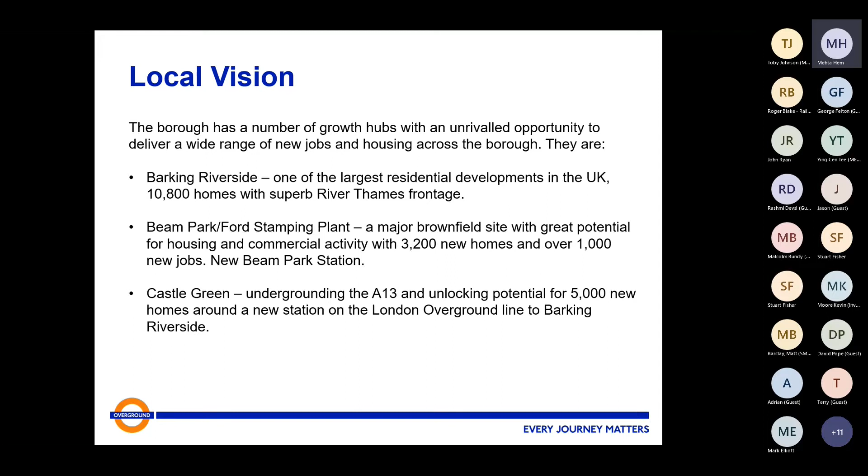Just capping on what we said already. So Barking Riverside, it's a key development area. The Riverside development is the largest housing development in the London area. The project outturn cost is £327 million. Transport for London are not paying for all of £327 million. Barking Riverside Limited, as a condition of their planning, basically fund the rail link. We began construction in autumn 2018 and train services are going to commence in 2022.

The delivery of the extension will unlock a wide range of benefits for people in the local area and beyond. The 10,800 new homes, many of which are actually affordable, along with a new school, which is actually now open and in operation, and healthcare facilities as well. The construction of a new district centre with commercial and leisure facilities, and it's now rumoured that there's going to be a mini O2 type events amphitheatre thing there.

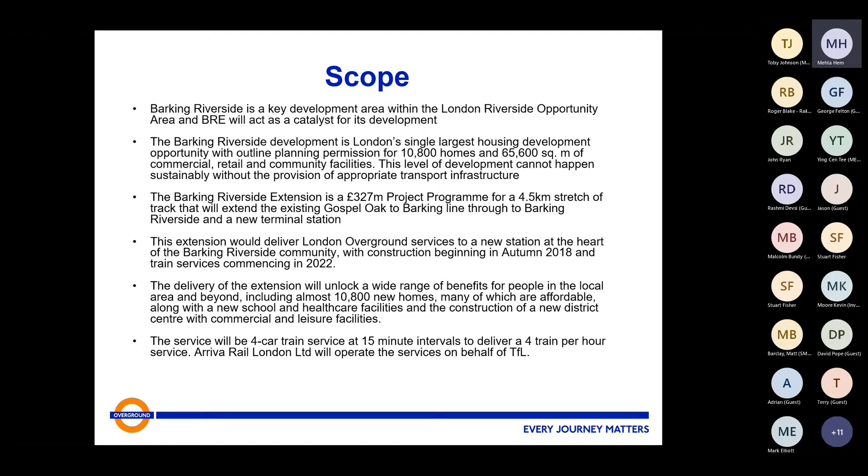The train service we're going to be running will be a 4-car train service at 15-minute intervals, so that's 4 trains an hour, and Arriva Rail London Limited will operate the services on behalf of TfL.

The stakeholders that we had to work with in the development of the scheme initially were Network Rail, the Strategic Freight Network, Barking Riverside Limited, London Borough of Barking and Dagenham, DB Cargo, Legal and General, who own a huge amount of land that we had to build our railway over. High Speed One, which was interesting. Lots of line-side neighbours, really from a land and boundary fencing point of view.

It is not just the extension to the network that we're building that's the problem, it's the fact that we had to reinstate the old abandoned down goods line from Barking all the way down to where our railway diverges. That runs through a heavily populated corridor. It was a 3-track railway, it's now a 4-track railway, and we had, I'm trying to remember how many now.

About 90 4-track overhead line portal structures to construct at the bottom of people's back gardens, and all of those were driven piles. So neighbours was a key concern during the development of the proposals. New schools: when there's a new school in the area and you're bringing a railway to the area, you have to consult with those and also make sure that the pupils are aware that what you're introducing is inherently somewhere you don't want kids to be playing.

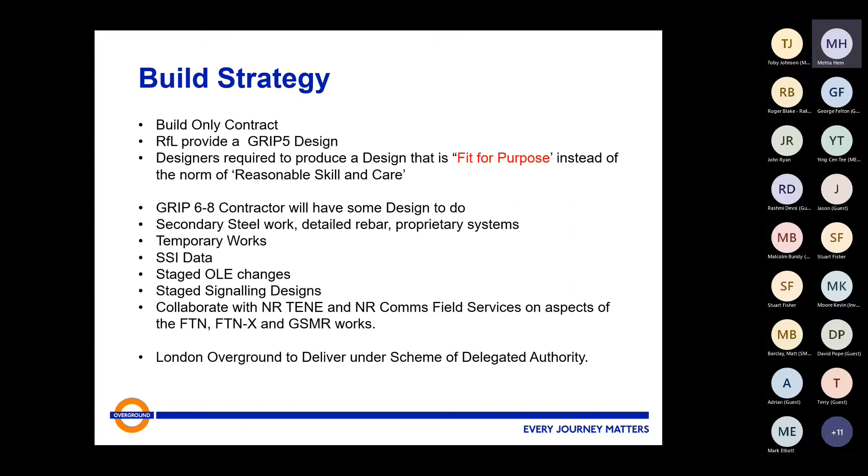So first off, there's existing infrastructure east of Barking Station. We reinstated the abandoned down goods line as a new up Riverside, and we'll get into that in a bit. On that section, there's 3 kilometres of new ballasted track. There were 13 renewed 4-track OLE portals. There were 8 new 5-track or more OLE portals. The longest OLE portal we actually ended up building, at Ripple Lane West, was 45 metres side to side as a self-supporting structure.

There were 62 new simple overhead line structures. We had to renew 3 overhead line neutral sections. In total, and this goes back to the bottom of people's gardens, there were 102 OLE piled foundations. A new 40-mile-an-hour crossover from the up goods to the up Riverside. This will make sense in a bit. And a new 50-mile-an-hour connection from the down Tilbury to the new down Riverside.

And also we remodelled Ripple Lane West sidings to give us the footprint to squeeze the new Riverside lines through in that area. That was 10 renewed point ends. Within Ripple Lane West sidings, there was a kilometre of formation remediation, and everything was basically re-signalled with associated TPWS and AWS infrastructure where it was needed.

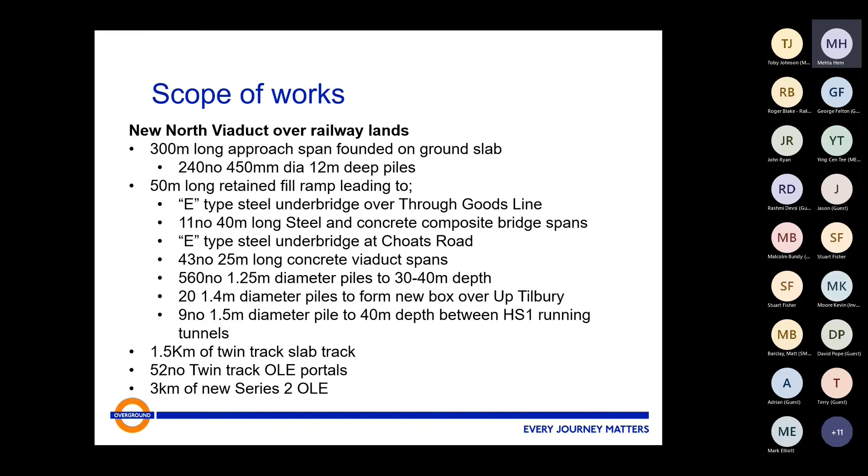So what that will give us is new infrastructure that supports the 4 trains an hour service. It also supports future service requirements for C2C. So when I referred to the TOCs and FOCs earlier, we had to do a huge amount of timetable modelling to prove that the future service requirements and aspirations of C2C matched with what you have to put in for the London Overground service.

Also, we had to factor in the effects of Beam Park Station, which is being built just down the road. In fact, it's about 800 yards away from where we split off from the railway.

We also had to clear all of the sidings that currently exist in Ripple Lane for GB2 gauge for High Speed 1 freight. Only one road was cleared for High Speed 1 GB2 freight, and unfortunately, as part of our scheme, that became a head shunt and got somewhat shortened, let's put it that way. So we had to gauge clear everything else in the area for continental gauge freight, and also cater for 2 trains an hour electrically hauled freight in the peaks as well.

The last point on this slide isn't actually accurate any longer. There were issues with the 25 kV feeder station at Barking because there was perceived to be problems with the incoming cables needing renewal by UKPN, which meant that, in effect, Barking feeder station was derated. But during the life of the project, the feeders were reassessed and pressure tested, and the feeder station is now working at its full capacity again.

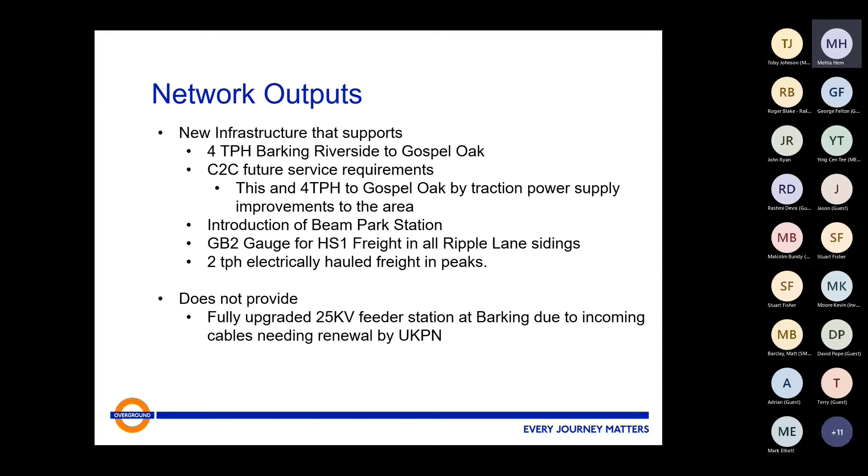Provision of 775 metre freights on the network is something everybody wants. We were requested by Network Rail to develop a full approval in principle design for those sidings to be built as a 775 metre scheme. We did that, delivered it to Network Rail, and when we finished Barking Riverside, that scheme then kicks off.

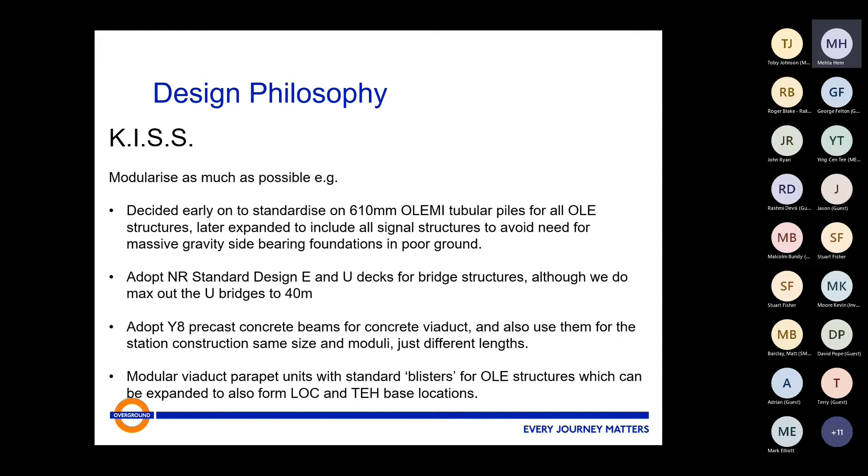Some of the problems we had were geotechnical - this was a real head scratch. The ground conditions in the Barking area, bearing in mind it's on the banks of the Thames, are extremely variable. It's alluvial deposits - there's peat to 5 metres depth in places, very high water table up to 1 metre below ground level. Lots of people actually thought the water table down there was going to be tidal. It isn't.

So rather than just relying on simple boreholes, we also undertook some pretty detailed geophysical investigation of the ground, to map out and see exactly what we were getting down there in terms of densities of soil and soil characteristics and behaviours. Boreholes are all well and good, but they're expensive and you can't do them everywhere. Geophysics is good and you can cover a large area. What you can see on the left is some of the geophysical results we got from doing the ground penetration radar and resistivity surveys over the brownfield site.

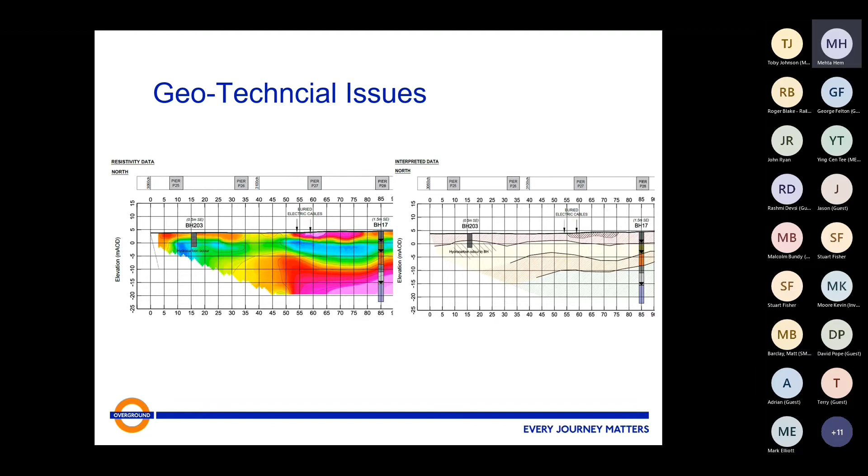When we got onto the actual national network itself, the formation and trackbed that we decided to adopt was completely compliant with Network Rail standard 4239 for formation and trackbed.

It is incredibly soft and incredibly variable though, so in critical areas like under the new 50-mile-an-hour diverging turnout, we used micropiling to stabilise the ground underneath. We also used other methods wherever we had to.

One thing we introduced since then as a value engineering exercise was, on the sidings and the new Riverside, to remove the dead load from the existing formation that you'd introduce from using heavy concrete sleepers like G44s. We went with steel sleepers instead.

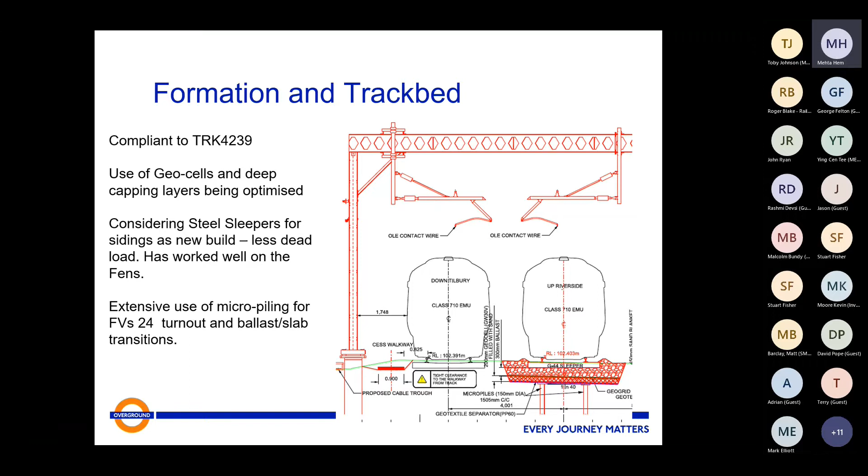Steel sleepers are lighter than concrete, but they work really well on soft ground conditions. I proved that when we were doing lots of steel sleeper renewals on the Fens back in the mid-2000s. It's all to do with precess waves and Rayleigh wave velocities, in effect trackbed critical velocity issues. It's worked well, and the steel sleepers enabled us to increase our delivery rates on some of the plain line sections.

Gauging, as we referred to earlier, was done as per normal, using Clear Route 2 for passenger running lines through an agreed vehicle line. Ripple Lane siding 1 was the only siding up there that was currently clear to GB2 gauge.

But as siding 1 disappeared as part of our scheme, to all intents and purposes any alterations to the sidings, including the up and departure line towards Barking, also had to be cleared to GB2 gauge because they were currently foul. In actual fact, it was only 3 signals that were foul to GB2 gauge, as we found out. At the time, ClearRoute, one of the standard gauging software packages, couldn't handle GB2 gauge, so we had to go down the road of using defined gauging as required by BS EN 15273. That was a bit of a challenge, but we managed to get it undertaken.

One interesting part of the project was that we required a blockade to undertake some works on the Up Tilbury line, and we needed to block it in that area for 6 weeks. There is a diversionary route for freight, meaning freight wouldn't have to travel over that section of track, and the train operating company C2C was quite happy for that blockade to take place.

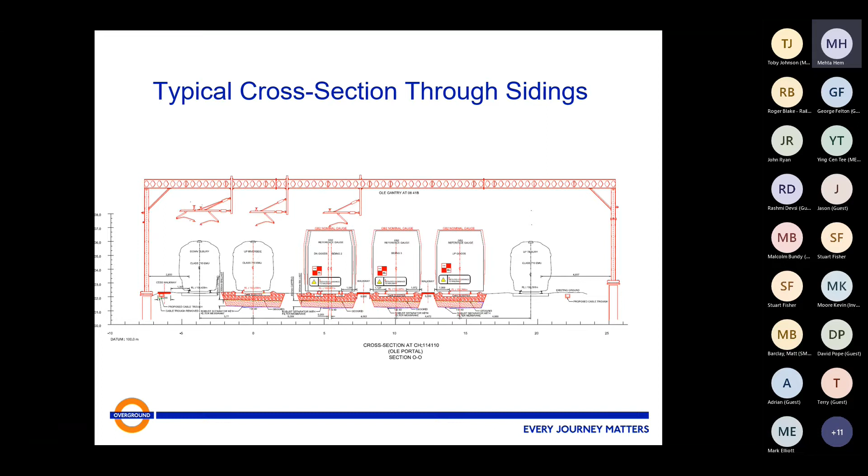Interestingly, all of the overhead line portals we built also had to cater for the future extension of those sidings to 775 metres. So some of them are a lot longer than they appear to need to be, but they won't be once those sidings get straightened out in the future and become even longer.

Don't really think we want to look at this. Right, okay. I'll skip through that slide. It runs for a long time. Some of the challenges that we had. Probably the biggest challenge that we had on the project was the high-speed running tunnels.

You see there in red is the model of the viaduct, the steel composite structures that are travelling over the railway lands. I hope you can make out the high-speed running tunnels that are there roughly about 15 metres below ground level and diving down to go towards Stratford. The only way that we could make the design work in terms of articulation of deck ends and getting everything to work properly was to provide a particularly long span there.

That's a 40 metre long span, which would need supporting in its middle, but we couldn't support it at right angles to the track because to do so would have meant piling through both of the High Speed 1 running tunnels, which probably wouldn't have gone down that well with High Speed 1. So what we ended up doing was piling between the 2 tunnels. That took a lot of agreement with High Speed 1.

To give you an idea of how close we actually got to the tunnels, each one of the High Speed 1 running tunnels has got a 3 metre annulus around it, which is a no-go area. And thou shalt not go within that 3 metres. And there's another 3.5 metre gap between the 2 annuli. And we had our piles at 1.5 metres diameter that had to go straight down in the middle of that gap between the two annuli.

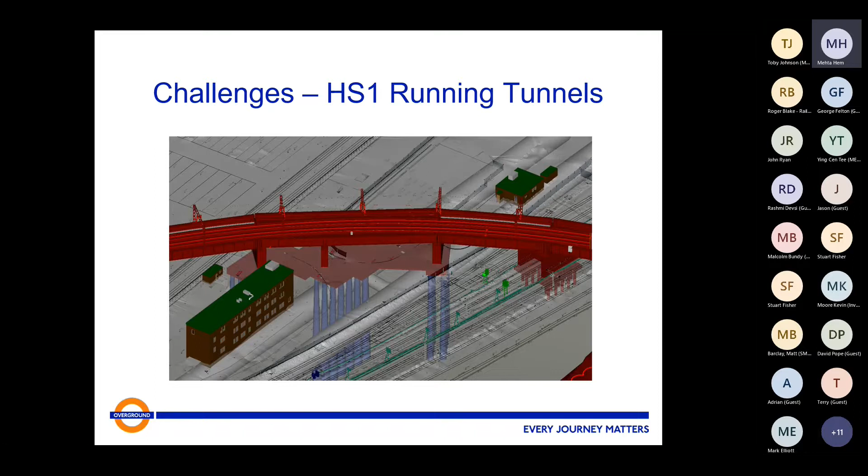A few more bits on the High Speed 1 bit there. I've already covered all of this. The piling was carried out under liquid support with bentonite. I think I've covered all of that off. Oh, the only other thing that we did have to do was work out how to transform the CTRL grid to OSGB36 grid and then into LSG 2007, which was the engineering grid for the project. That taxed the minds of an awful lot of people. In the end, University College London spent 4 months working out how to transform between the 3 grids to actually get something right.

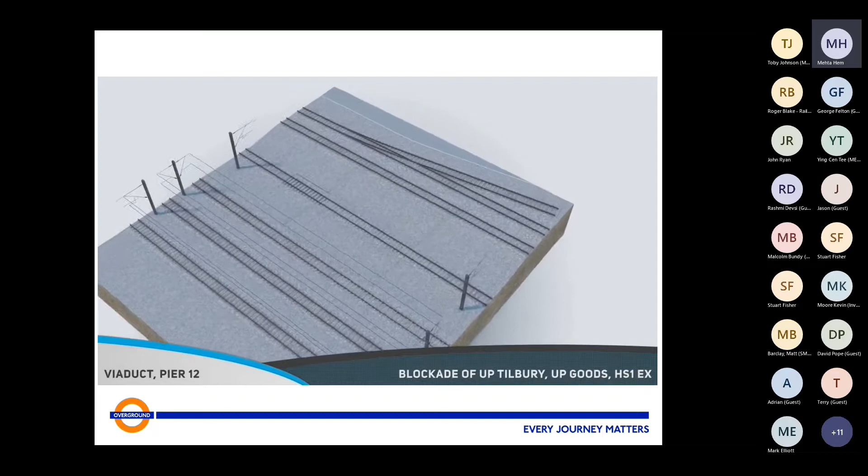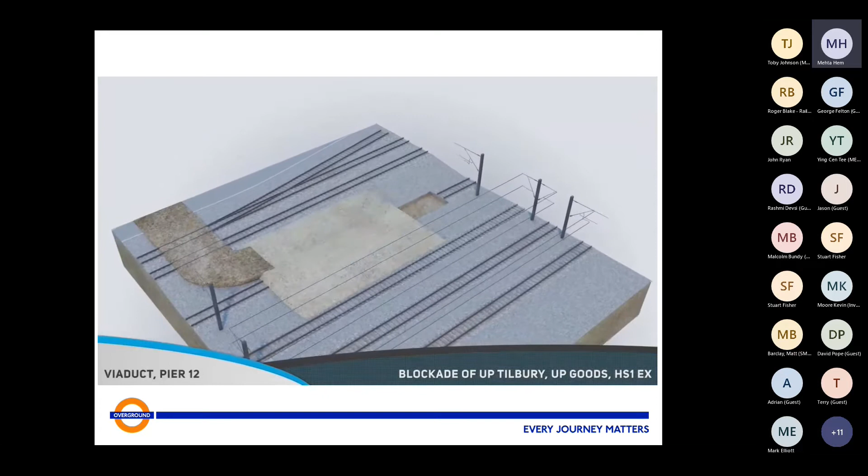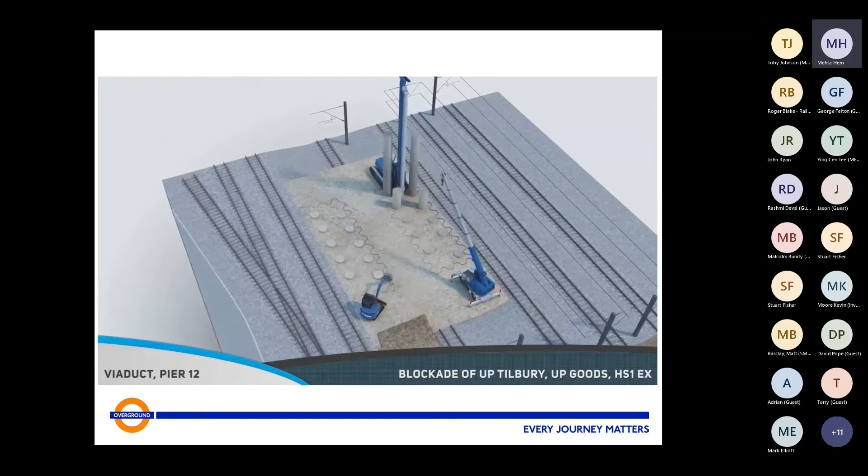I was talking about the box over the Up Tilbury, and I've also spoken about the works that we did at Upminster to gauge clear. We had here, in a 6-week blockade, we had to build foundations. The reason we took a 6-week blockade was to do it. Doing it in a normal weekend session, you'd only get one pile session every weekend. That was just 6 weeks.

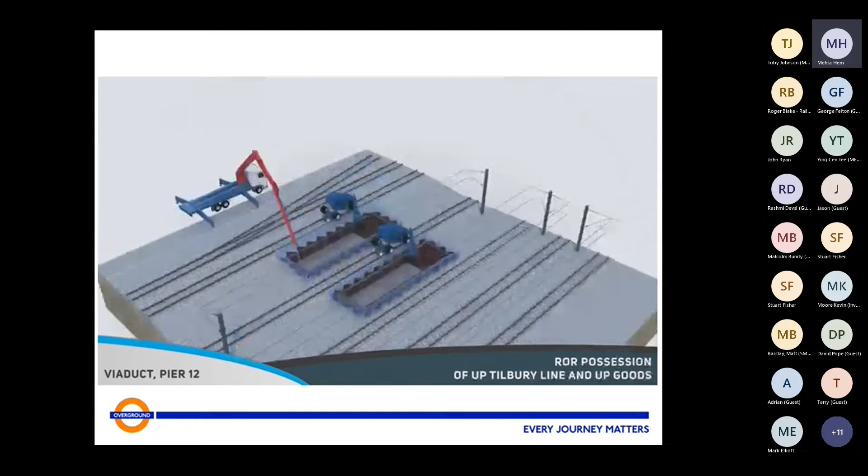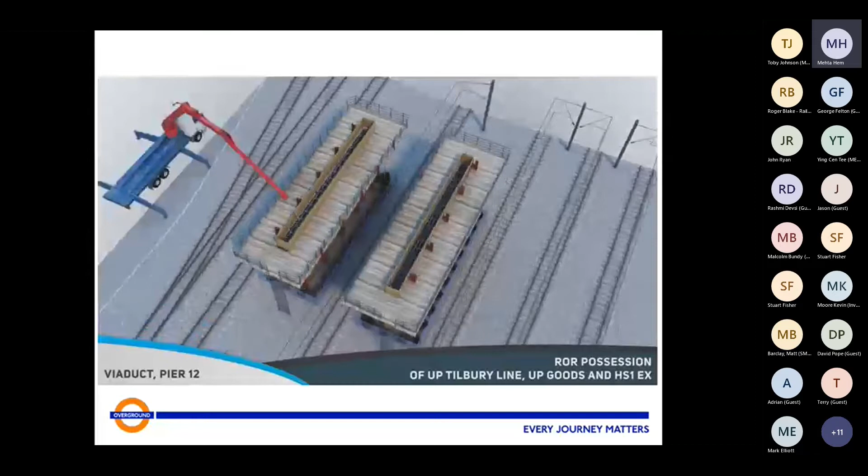And what you're seeing now is the follow-on works as predicted by the computer modelling. 4D modelling. And now you can see the bearings going up on the plinths for the support for the new viaduct structure that goes over the top.

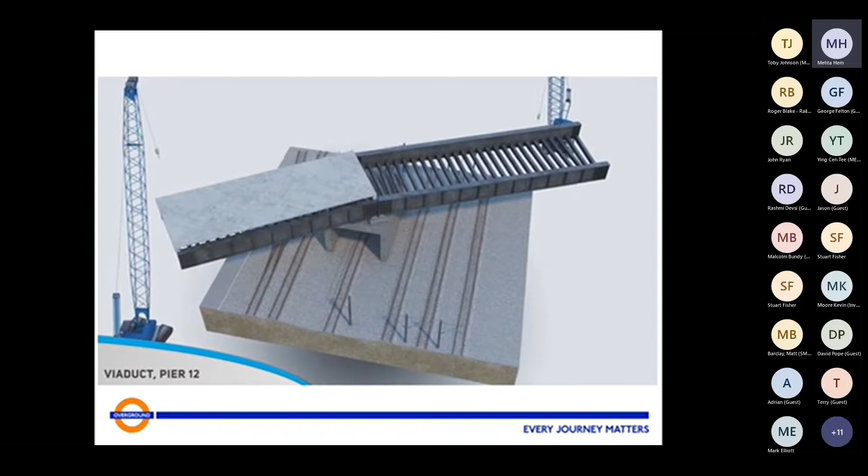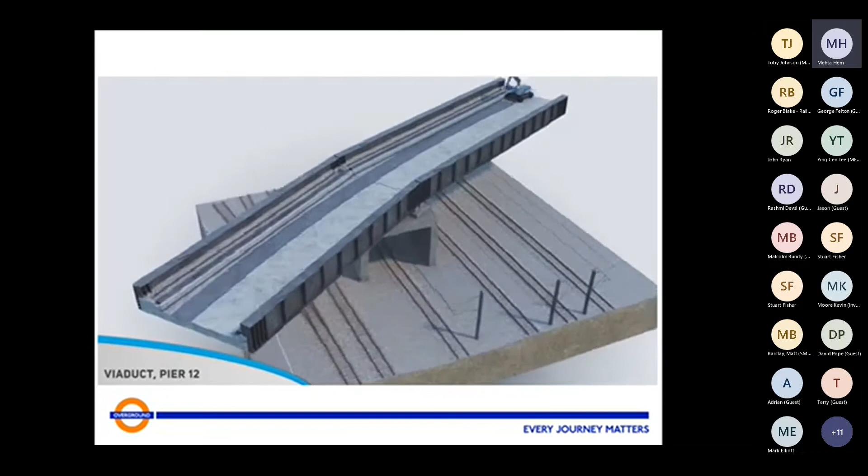Which is all very nice in terms of 4D modelling, but this is what it actually looked like in reality. It's full work. This is after the blockade. We've returned the railway to operational service now. It's the process of returning it to operational service.

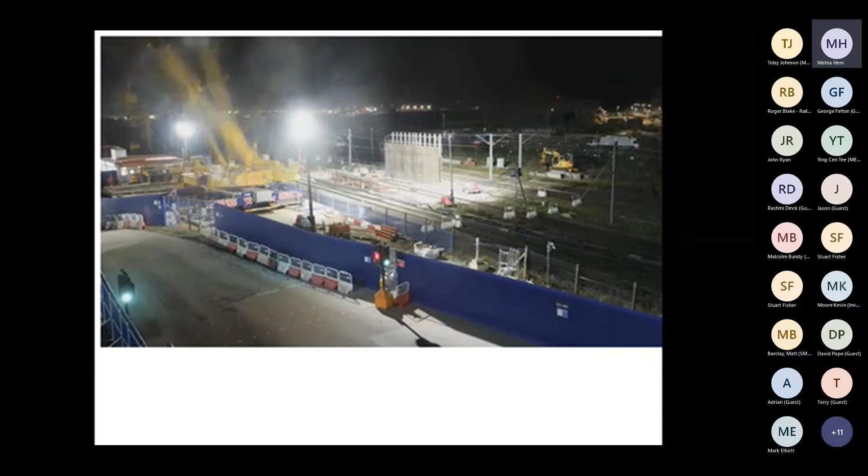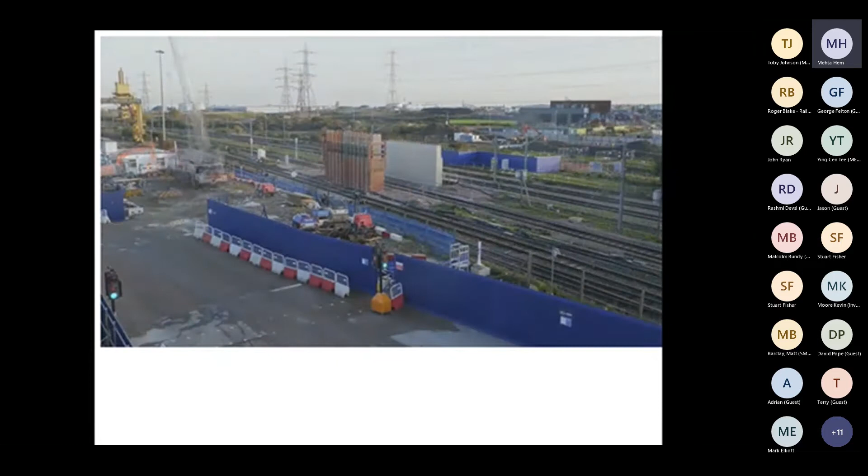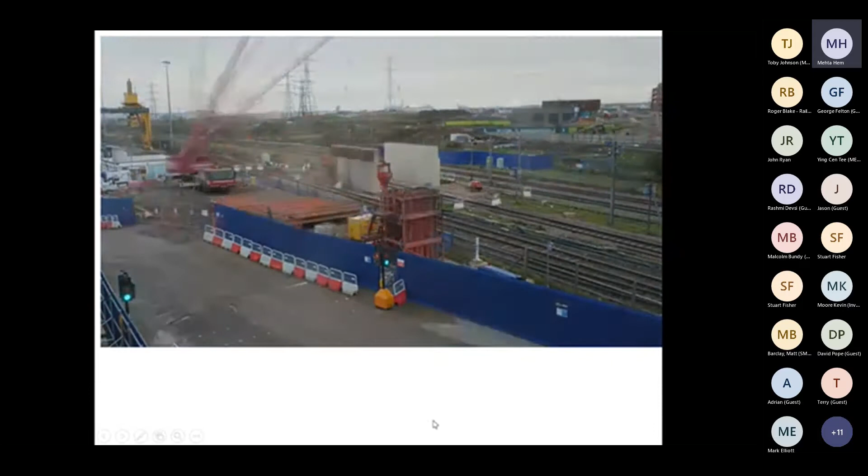All of this work is being done in weekend possessions. We're doing other work. So what you're seeing here really is pressed into a couple of minutes. It's probably fair to say that this box is one of the most difficult things to build that we've had to do on the project.

Oops, don't know what happened there. Sorry about that. I seem to cut that short. I won't go back. We don't want to go through that again.

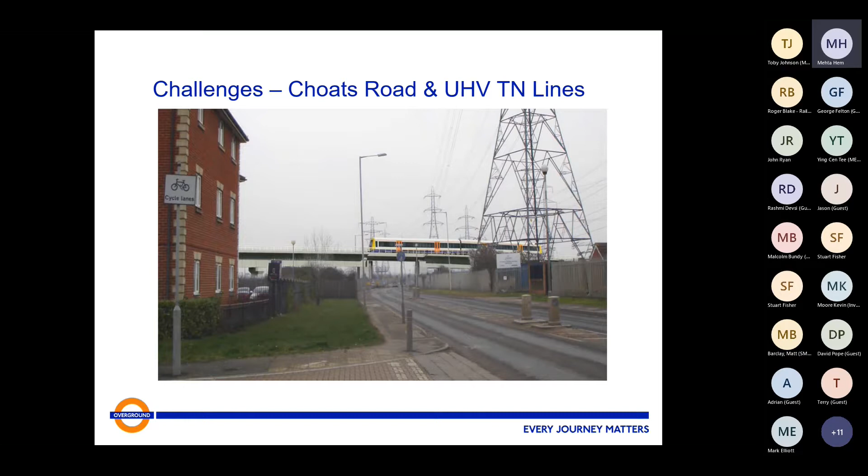When you actually put all the figures together for what you require for electrical clearances and safe clearances as per BS EN 50122 part 1, we ended up with a 100mm tolerance window within which we could actually put our rail level. Very challenging. At the same time, we had to make sure that all of the track gradients were compliant, all the equivalent gradients were compliant because of the curvature of the railway at that point.

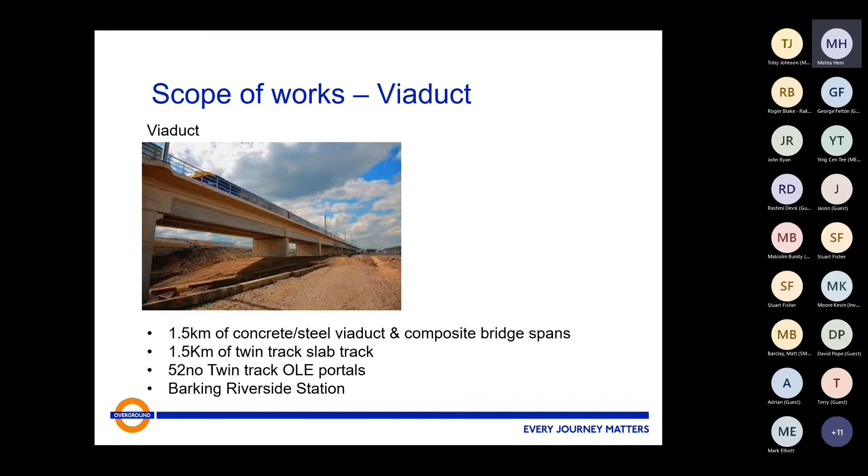So the viaduct itself is 1.5 kilometres. We said already, concrete, steel viaduct and composite bridge spans. There's 1.5 kilometres of twin track slab track. On the viaduct itself, there's 52 twin track OLE portals. We've now got quite a few single track cantilevers in there to improve signal sighting. And there's Barking Riverside Station at the end.

Oops, don't know what's happened there.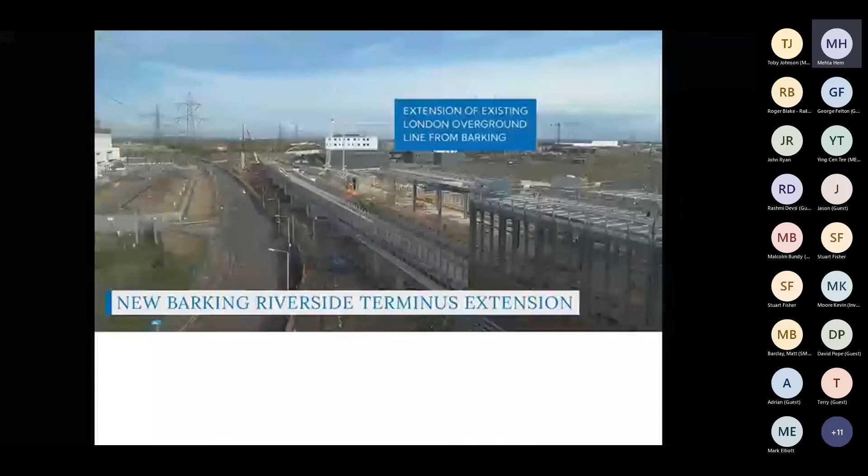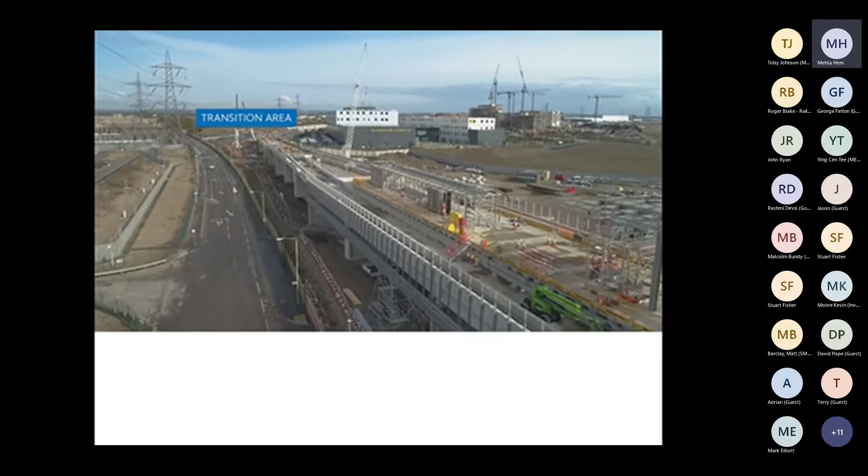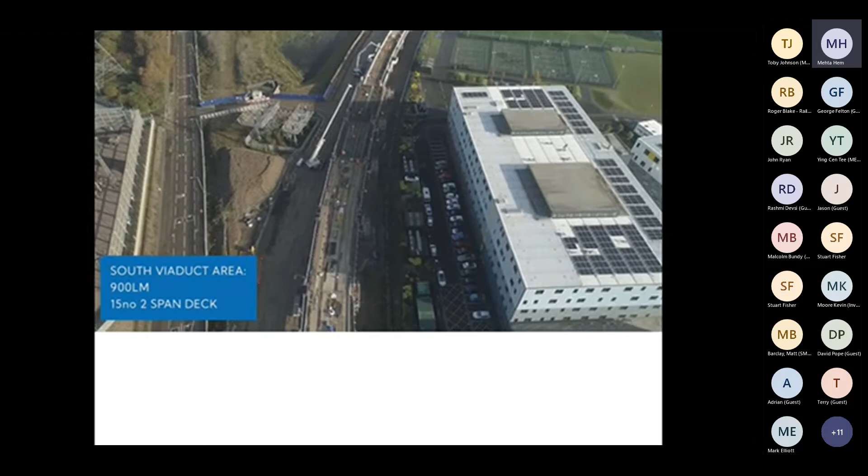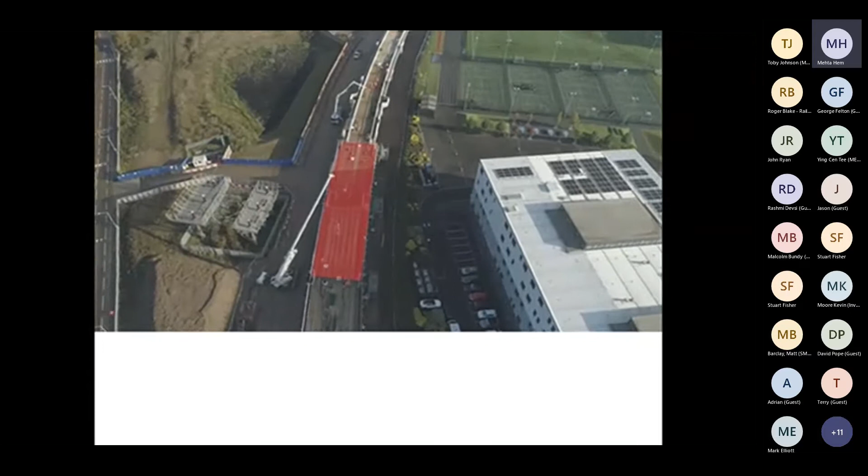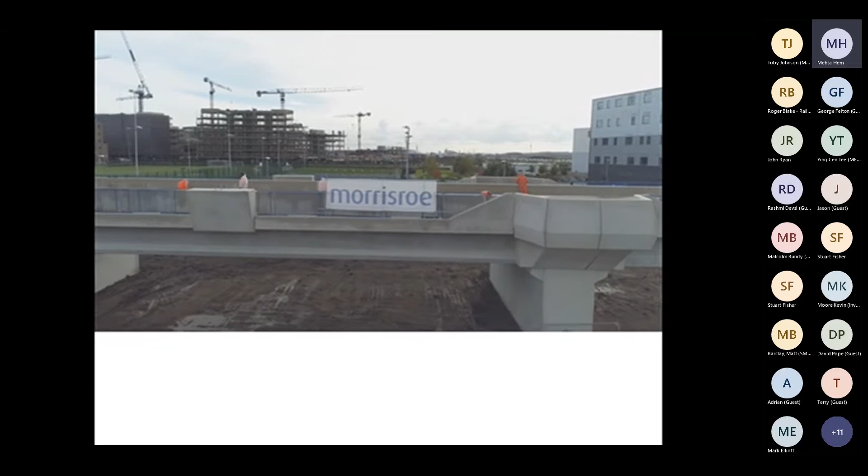That's Morrisroe there. And this is what we start. You can see the development going on actively in the background there. That's for the homes that will be leased for sale once the extension is in operation.

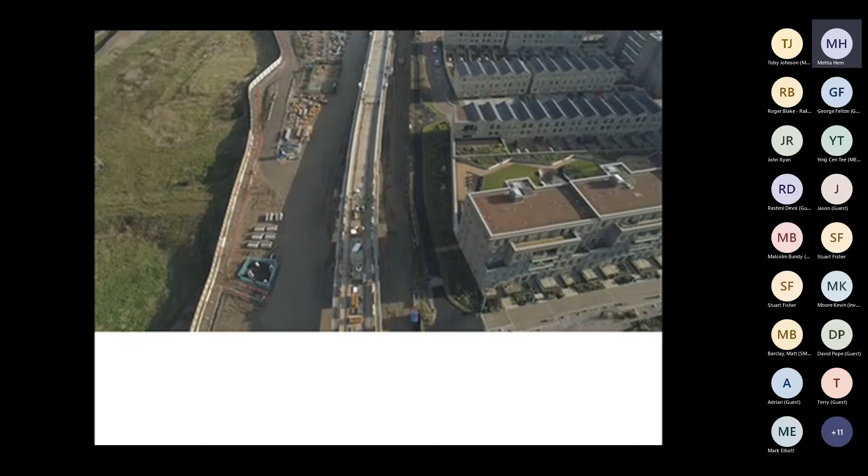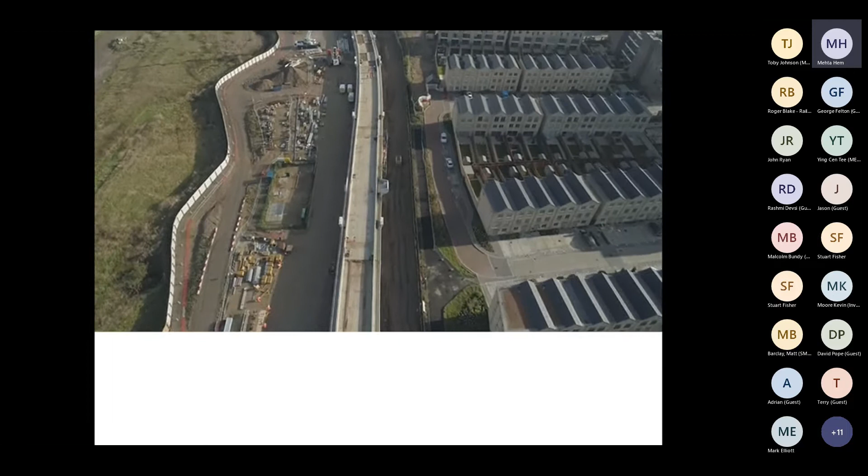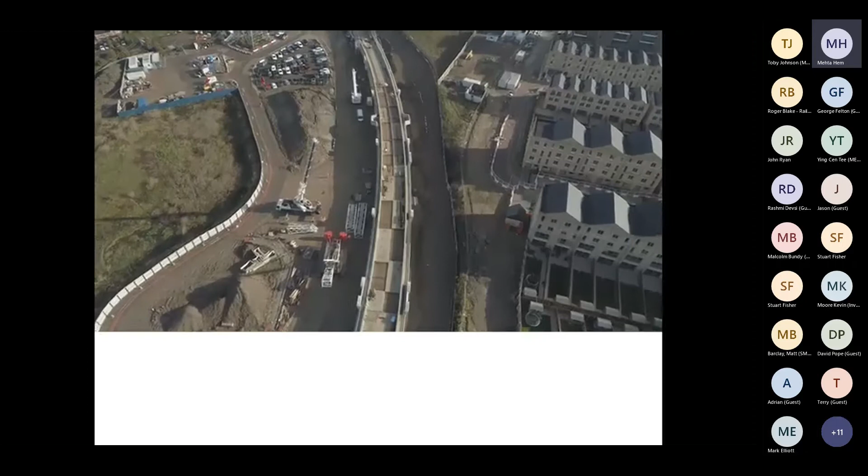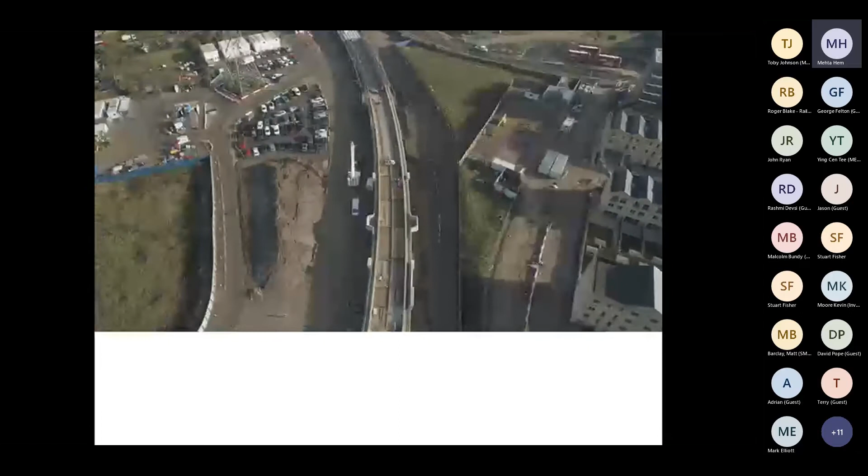Yeah, lots of ground stabilisation because the ground conditions are so poor. Intermediate deck slabs, they're cast in that checkerboard pattern because they all have to act independently of the main bridge deck. That way you get over some of the problems with track bridge interaction. Not the access part of the structure.

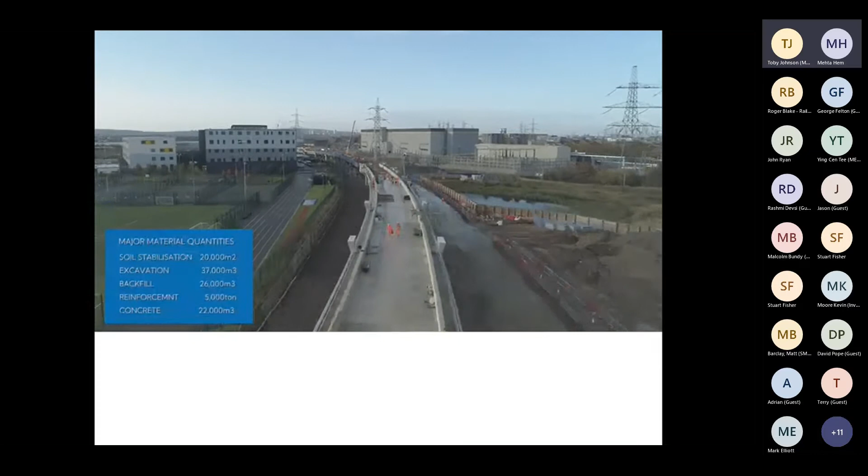That gives you an idea of the sort of volumes of materials that we had to play with just to actually build viaducts. In terms of what we did with the ground, how much concrete we've used, which environmentally is no...

Oops. Can I go back?

So that's just a quick overview of the viaduct itself. The ramp and the viaduct track form. We had some real challenges with this. So it was a 1 in 40 gradient cresting to a 225 metre radius curve. Welded rail for noise limitation.

And obviously you saw how close we are there to properties. There's going to be a lot more development in the area. We have to use CWR, and the only way we can do that is going to be the slab track. It's a very steep gradient to get over the High Speed 1 exchange sidings, over Choates Road and under the transmission lines before rising back up again to give permeability beneath the viaduct.

One thing the developer wanted was they did not want a railway running at grade. So that would basically cut it off from the land on the other side. And to be perfectly honest, if we built a railway at grade anyway, it would have been a viaduct at grade because the ground conditions are so poor. So we would not really have saved anything by going at grade through there.

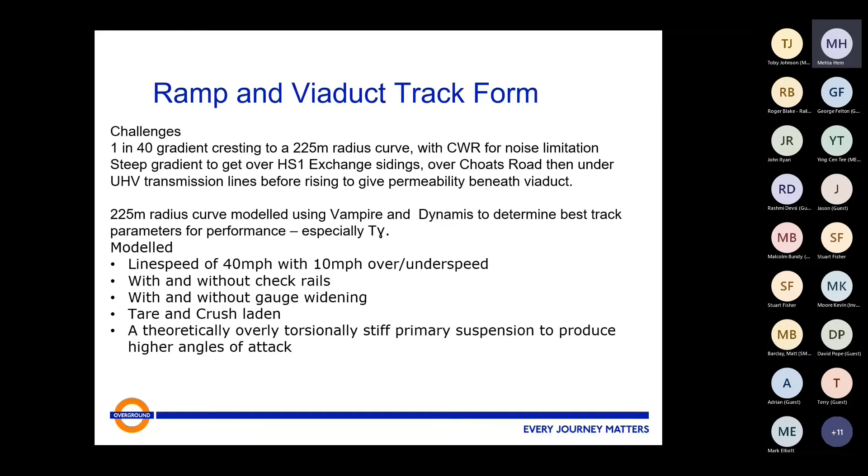With the various variations in track gauge, the variations in applied cant and vehicle speed, the unchecked case results in only marginal changes in Y over Q and wheel lift. Y over Q, the propensity for derailment, the figures were really good, incredibly low. We didn't expect to get that, but we did. So much so that the case for a check rail to limit the propensity for derailment was marginal, eliminated the check rail from the design.

The main driver behind us doing that was that check rails, when you do get flange contact with check rails, make a huge amount of noise. If there had been a definite positive delta in having a check rail there in terms of limiting the risk of a derailment, we would have kept a check rail, but there was basically nothing in it. So getting rid of the check rail will limit any noise radiated into the environment.

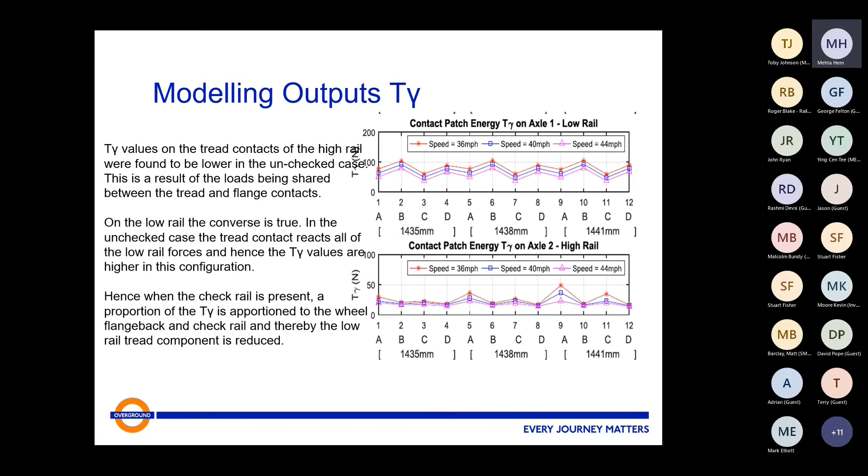T-gamma forces. Again, we found what we thought we were going to find anyway, which is that T-gamma actually bounces around all over the place. If you have a check rail or if you don't have a check rail, I mean, the check rail will always reduce the T-gamma on the high rail because it's the back of flange that's taking the force, hence the noise. But none of the T-gamma values that we were getting again were high enough for us to believe that we had particularly high risk of RCF being so tight.

So we came up with a series of recommendations as a result of modelling. For crush laden, and is every train going to run crush laden on a route? Probably not. But the peak Y/Q value was found to be 0.37 relative to the limit value of 1. Now, that resulted in a peak wheel lift of 0.8 millimetres relative to a limit value of 6 millimetres.

And as would be expected, those peak values were predicted to be for high rail flanging wheel in the unchecked case. That's nowhere near a point at which we get concerned. Normally with Y/Q, we start to get concerned around 0.75, 0.8. So we're well in the comfort zone there.

Additional simulations for the class 345 in the tare condition and modified tare conditions have resulted in only a marginal increase in the maximum recorded Y/Q to 0.42, with a corresponding wheel lift of 0.88 millimetres, and both values remaining significantly below the limit levels.

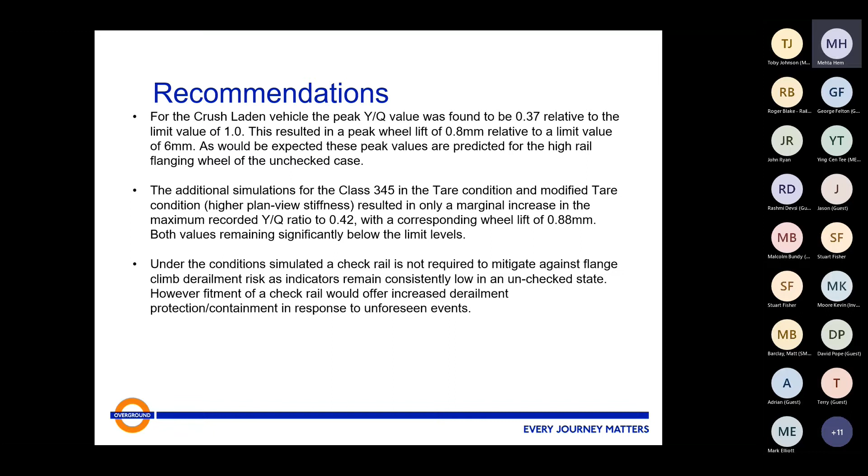With regards to gauge widening, there was no significant net benefit found. All cases studied were at a high cant deficiency, greater than 80 millimetres. There wasn't any significant additional benefit demonstrated in reducing the applied cant, i.e. increasing deficiency, from the proposed design value of 100 millimetres down to 50 mil. And hence, from a passenger comfort perspective, it was recommended that the applied cant stayed at 100.

It was noted that in a number of places the applied cant levels and speed studied resulted in excessive cant deficiencies of 122.6 millimetres. But those were theoretical overspeed events. So if the line's actually driven as it should be driven, you don't hit those excessive cant deficiencies. But we wanted to know where we get to if there was overspeeding occurring.

Now, another thing that I'm interested in, the viaduct track form. The viaduct track form is not particularly new or novel. We're using STA, manufactured by Porr in Austria. It's a mod... has been used in the UK, in other places. It's never been used in the sort of environment that we've used it in Barking, i.e. such tight radii and on such steep gradients.

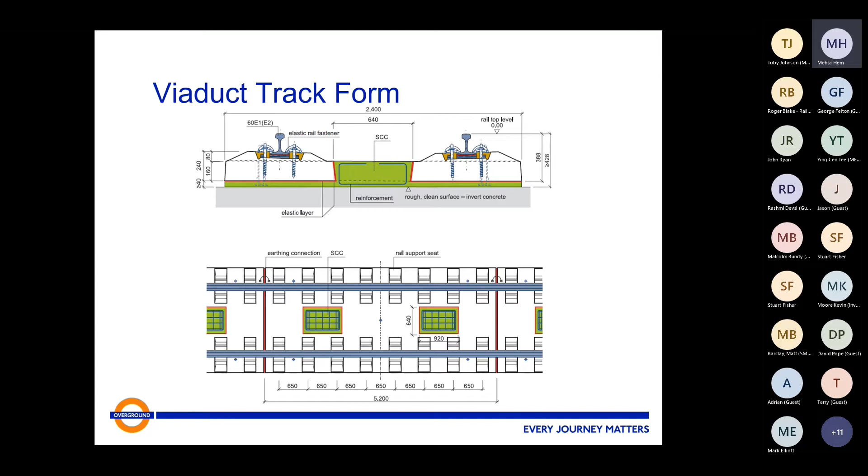But it has been installed. It's in Glasgow Queen Street tunnels. It's on the Gospel Oak to Barking line, through Crouch Hill Tunnel, and in the Walthamstow Queens Road area. There's quite a bit of it through there. So we've learned some lessons from that, but we've had to develop the system further to put it on the viaducts that we've built.

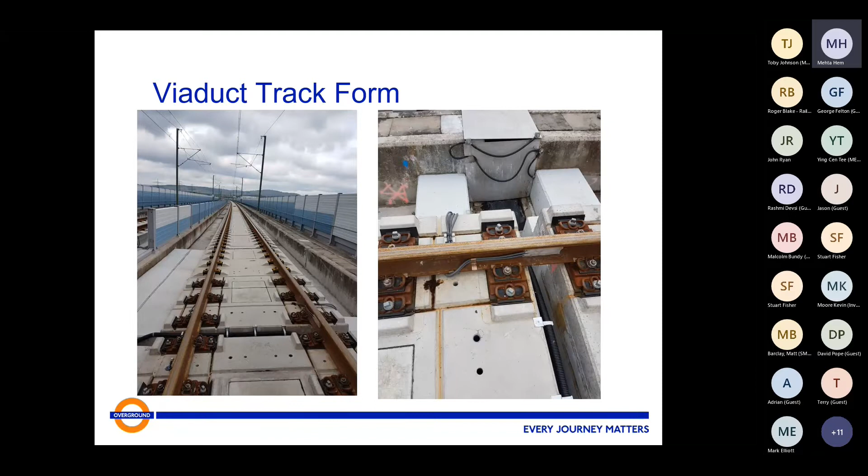One of the problems that you have with slab track is the limits that you have for deck end rotation. The deck end rotation is specified within the Eurocode, so that thou shalt not exceed 2 milliradians of deck end rotation. By and large, the viaduct passed, but there were areas where it didn't quite work. Now, deck end rotations can be managed.

It's worth noting at the time when we started the design on this, all that we had was the Eurocode 1, BS EN 1991, parts 2, 5, etc. In parallel, there was a work stream being undertaken by the CEN committee on slab track, which resulted in the publication of paper CEN TR 17231, which made recommendations as to how you could overcome the deficiencies within the Eurocodes, and with

that means that slab track on viaduct structures can sometimes get itself into a little bit of trouble. The little bit of trouble that we're talking about is a thing called axial rail stress, or more specifically, additional axial rail stress. So why is it an issue? Interaction between the track structure and the bridge structure, i.e. the consequences of the behaviour of one of those structures on the other, occurs because there's a physical connection between them, whether the rails are directly fixed or there is a ballast bed in between the track and the bridge.

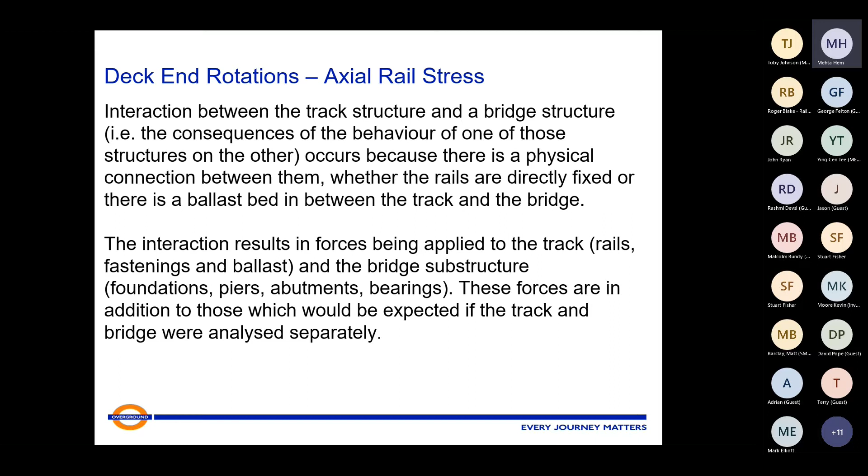What tends to happen is that the structure, and they will take account of the factors that sit in the Eurocode, such as load model 71, an alpha factor of 0 or 1.5. They'll get a set of results that they're reasonably happy with, but they won't go deep enough into the track system itself to see what the effects are on the actual physical components of the track. And that's something that this CEN TR paper addresses.

So as I've already sort of wibbled on about, Eurocode 1 defines the requirements for design of structures and traffic loads. The code itself addresses the basic requirements for structural performance for specific load cases. It doesn't address the impacts of that on the track system. And so Eurocode 1, wonderful thing, but it doesn't really help you when you start considering the requirements of EN 13481 Part 5, performance requirements for slab systems, or for EN 13643, ballasted track systems.

That one's interesting because ballasted track systems, you have high-speed applications, although it does refer you back to EN 15528 for line categories. When we say high-speed applications, all of the Eurocode calculations consider high speed, i.e. 200 kilometers an hour or higher running, and they consider a minimum radius of 1,500 meters.

Barking Riverside, we're running at 40 miles an hour, on a 225 meter radius. And the load models that are contained within the Eurocodes don't really apply. They don't downscale and give you accurate results. So when you're in a low speed tight curvature environment, that leads to structural designs frequently leaving the track system with complex issues to resolve, and that's the case that we had in Barking. So once we downscaled everything, the track system failed using load model 71 loads for rails and rail stresses.

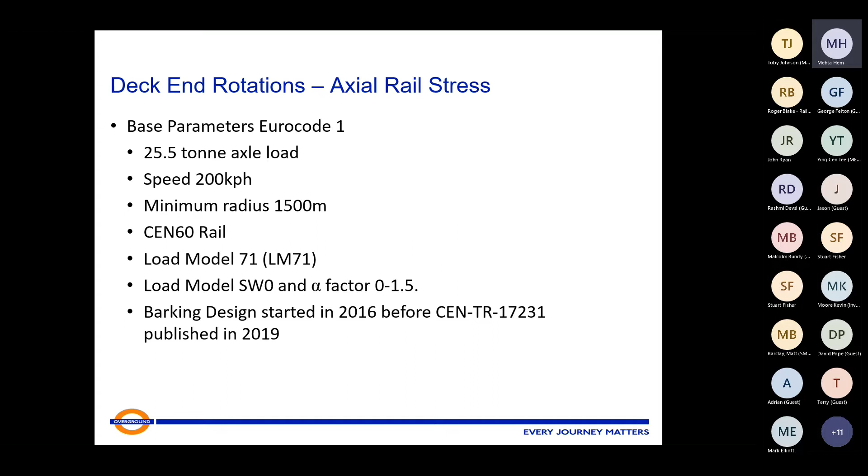So just to quickly go into it, deck end rotations, axial rail stress: the Eurocode load is 200 kilometers an hour, min radius 1500 meters. It's CEN 60 rail; we're using CEN 56 rail. It's got load model 71 in it. It's got load model SW0 and the alpha factor of 0 to 1.5. And as I said, the Barking design was started in 2016 before the CEN TR paper was published that made recommendations that address a lot of these issues. But basically, a huge swathe of the Eurocode needs to be rewritten so it becomes useful across the piece.

So we had this problem with the deck end rotations being too great. It's in excess of 2 milliradians. So on ballasted track, where concrete sleepers would be used, the principal effect would be rapid deterioration of the ballast, resulting in twist development at deck ends and a reduced asset life. Now, bear in mind, because of the transmission lines, we couldn't use ballasted track at Barking Riverside because the construction depth for the ballasted track would be so deep that we couldn't get clearance under the high voltage transmission.

On a slab track system, that's fine and dandy, but the mitigating factor then becomes the fatigue and stress limit of the rail fastening and the stress capacity of the rail itself. Now, we could get over the first part of that by adopting a Deutsche Bahn design for the USP BSP plate. That's a very resilient plate and clip. We used that on the first 3 rail seats, abutting the 3 deck end USP plates. That then gave us the problem with the stress capacity of the rail to solve.

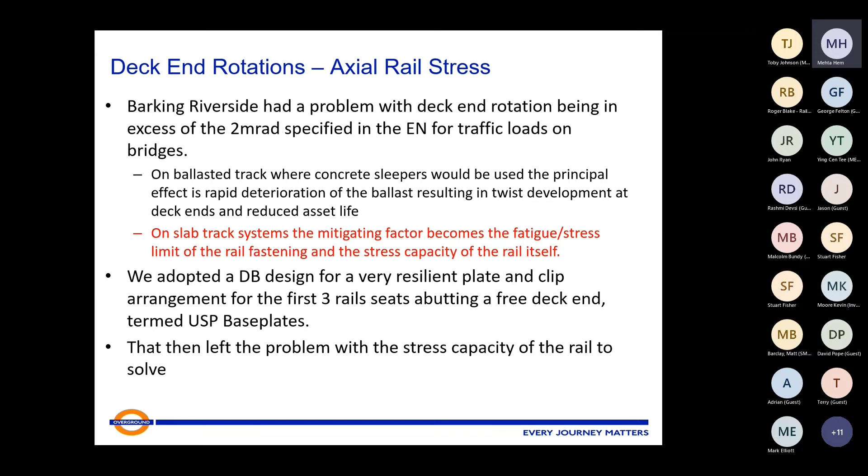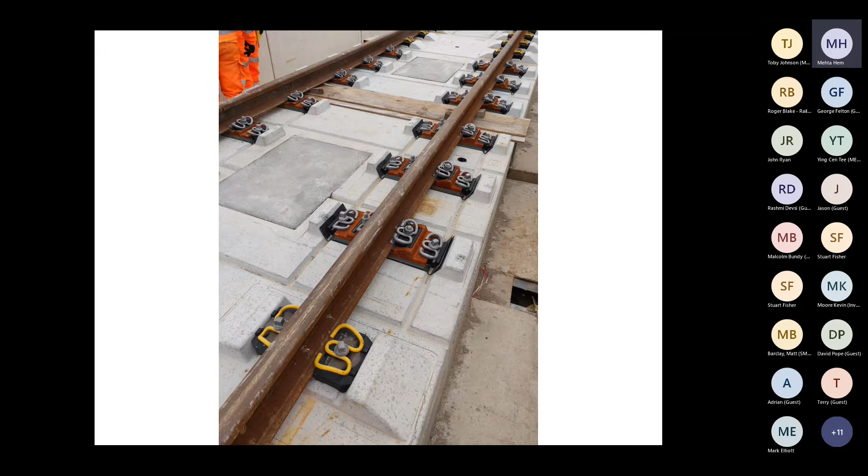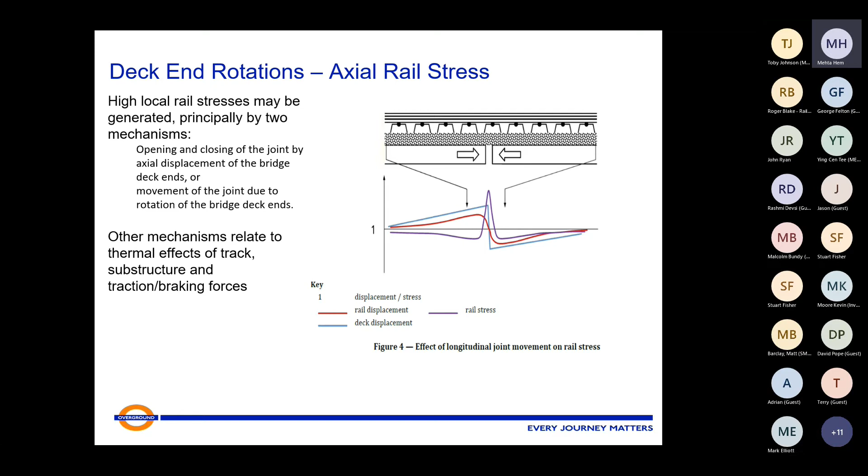So we know that we're going to have a problem with axial rail stress. High local rail stresses can be generated by 2 main mechanisms: opening and closing of the joint by axial displacement of the bridge deck ends, or by movement of the joint due to the rotation of the bridge deck ends. And there's other mechanisms that come into play here: thermal effects of the track, the substructure, and traction and braking forces. Traction and braking, at the speeds we're talking about, aren't really that significant.

We have to consider a huge amount of things to actually determine what it is that we're doing. We wanted to understand what an acceptable level of reserve axial rail stress is. We know what the limiting axial rail stress is, i.e. at which point the rail is going to break. So what we were interested in determining was how much stress were we putting into the rail, and how much reserve axial rail stress was available to us that is believed to be reasonable within Europe. And did we actually breach any of those values? So there's a huge amount of things that you have to consider and think about. Your static wheel force, it's all there in the table. I don't want to go into it in detail because I'll be here for hours.

And then your various formulas. One interesting thing is if you actually follow the TSI clauses for lateral track resistance, which is what most NoBos and DeBos will insist that you actually carry out, you can carry out the calculation quite simply for a system such as Barking, and that will tell you that everything's okay. So we had a maximum permissible lateral force of 13.97 kilonewtons, which is great because that's within the rules. But again, these rules are defined by the Eurocode.

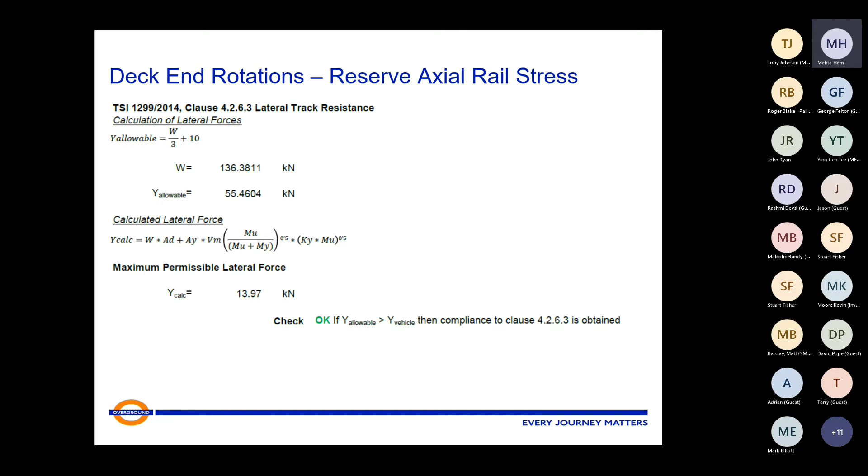One could argue the Eurocode isn't valid when you're at low speed, tight curvature arrangements because nothing scales downwards. So even though we were compliant with the clauses in the Eurocode for lateral track resistance, we weren't compliant with the requirement for what we're doing with axial rail stresses, which isn't expressed particularly well.

So what we ended up doing was modelling the system, carrying out an awful lot of sensitivity analysis, looking at the way that stress is distributed throughout the rail, from the centre line of the rail to the edge of the rail foot. Our worst case is always going to be what is the stress at the edge of the rail foot, because that's where if you have any form of nick or defect or potential stress raiser, that's where your stresses are going to be highest, and that's where the risk of propagation of a break is going to be worst.

So what we actually worked out was that using a load factor of 1.3, because we didn't want to use 1.5 - because 1.5 would equate to a 25.5 ton axle load, and class 710 trains are only a 15.2 ton axle load - we could reduce the load factor. We could reduce some of the stress factors within the rail by using those so-called clips.

And we worked out that the reserve stress available within the rail at the joints where we're using the BSP plates was just above the proposed 112 megapascals limit. The proposed limit is the limit that is in the CENTR paper. So we have a proposal to monitor that in service. That'll be the first time it's ever been done. We are not aware that anybody else has ever monitored the axial rail stress at the 3 worst case locations on the structure when it goes into service, and get a year's worth of data to see what it's doing.

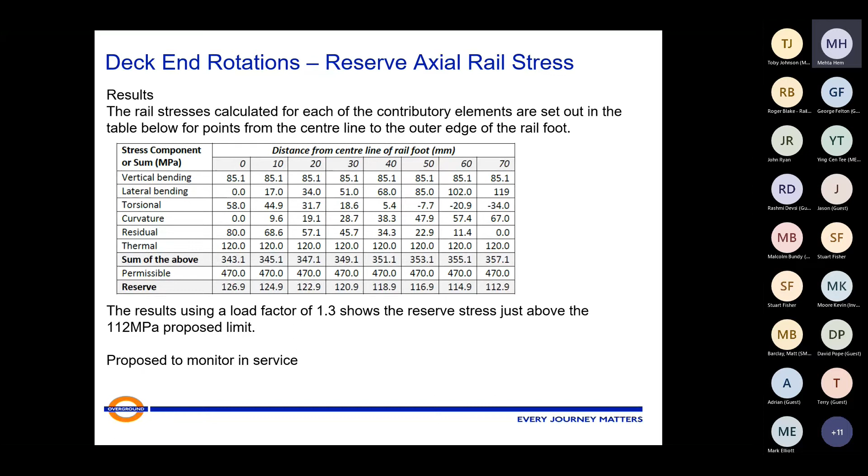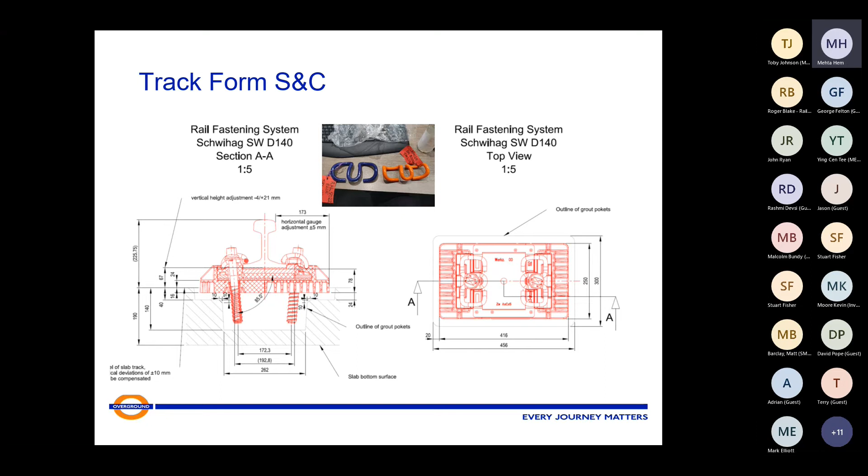It's a modular system for the S&C base plates. As many of the components within the system as possible can be used in different configurations, which we worked quite long and hard to ensure that all of the parts could be manufactured and basically Legoed together before they actually become part of the slab when it's cast in. It's a pretty typical sort of system that you're going to see for slabs. So you've got the support layer, a support layer plate, a resilient plate, then the rail base plate, then the rail pads, then your rail and your rail clips, and your standard Vossloh dowels with SKL clips. It's pretty much a piggyback system.

This differs quite radically from what's been done on S&C on slab before. We took a different approach to resilience. Other S&C systems like Sonneville and the likes are designed for a static stiffness, not for deflection. So we've flipped it on its head. We've designed the system to actually deflect by 1.5 millimeters throughout, varying the stiffness of the support layers. There's less force and wear on the components within the system. It's the pad that does the work, not the rail and the fastenings.

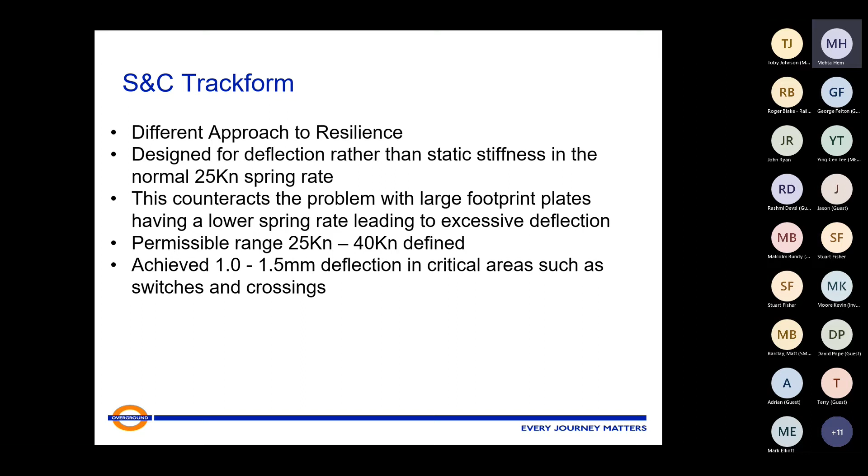The point operating equipment is first of type in the UK, Voestalpine Unistar electro-hydraulic. It's cost effective, drives like a clamp lock, it's wired like an HW, uses standard HW SSI data. It's fully trailable up to 40 kilometers an hour with no damage to either rail or machine. There's no stretcher bars required. It's SIL4 rated, with an expected failure rate in the region of 50 years, and one mean time to failure of 68 years.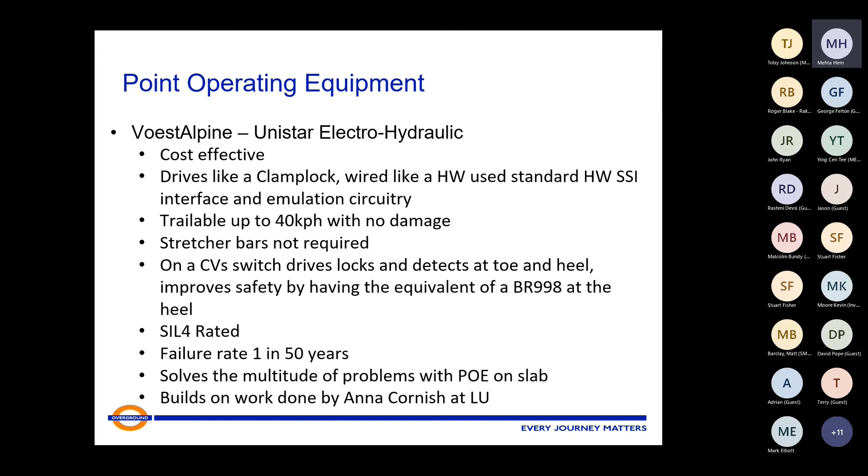It solves a multitude of problems with the point operating equipment on slab, and it builds on work already done by Anna Cornish at London Underground.

I've got my final safety case meeting on it in a couple of weeks' time with Network Rail, and today I'm in Edinburgh doing training on Unistars with Network Rail staff for the first deployment, which is our 60 Mark II 1 in 28 switch diamond that goes into use at 100 mile an hour at Christmas.

That's it quickly, and where I'm overrunning my time.

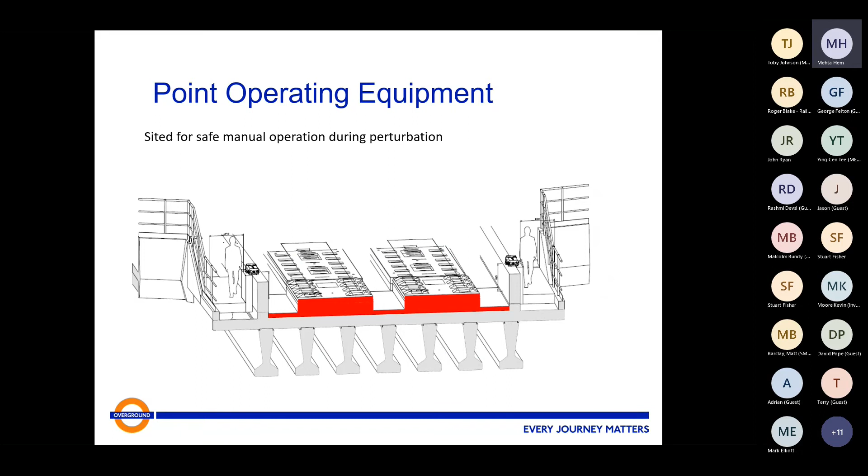Two drive units at Barking, sized and sited such that someone can always be in a place of safety when manually operating it.

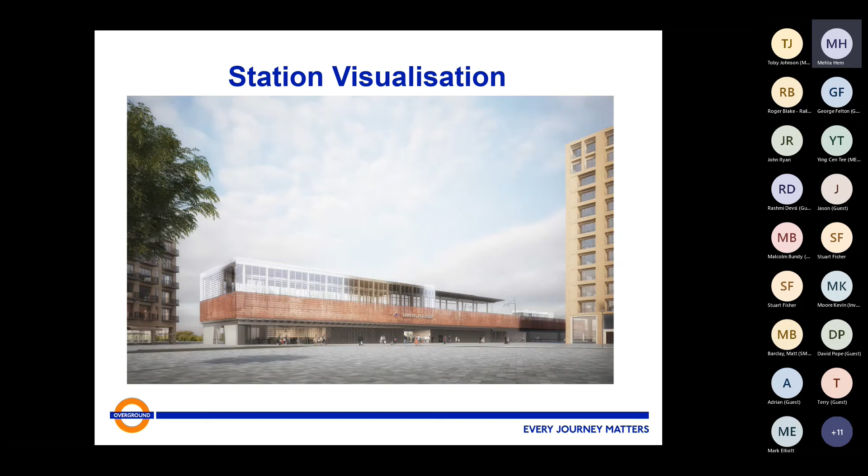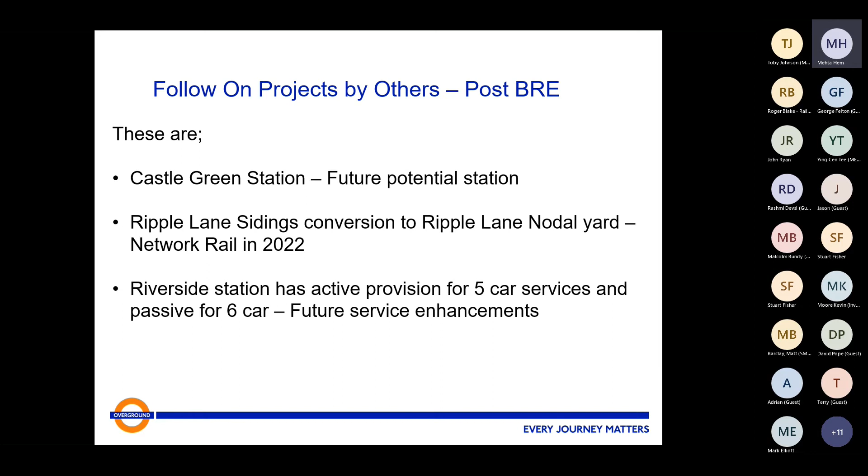Follow-on projects after Barking Riverside include Castle Green Station and Ripple Lane sidings, which I've mentioned already. Barking Riverside Station itself has active provision for 5-car services and passive for 6-car. It's on a viaduct up in the air, so we took a conscious decision to future-proof the station.

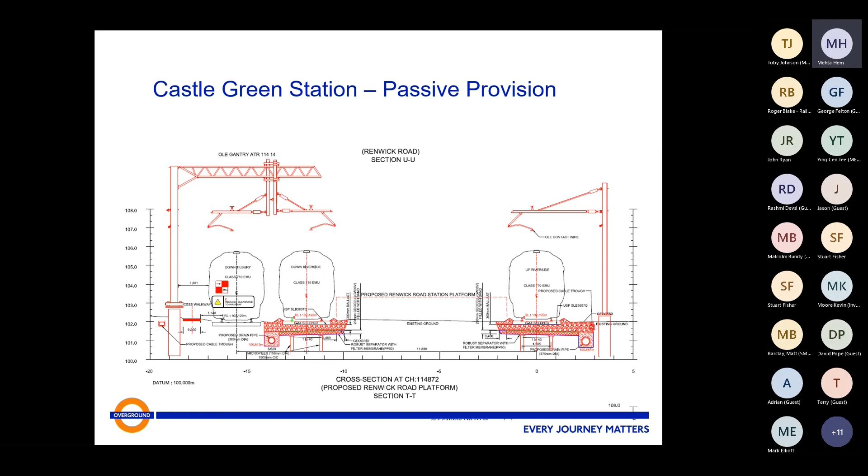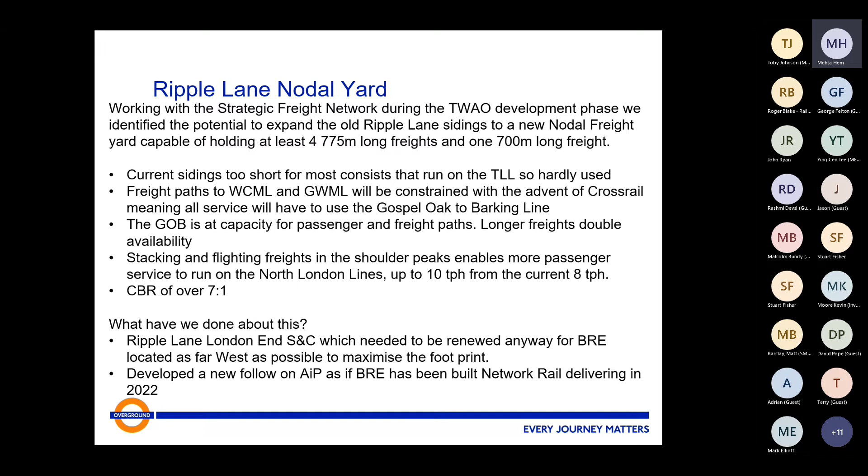Ripple Lane Nodal Yard we've already discussed briefly. What it does is straighten out the bits we've finished and extends the sidings further towards country, as you can see there.

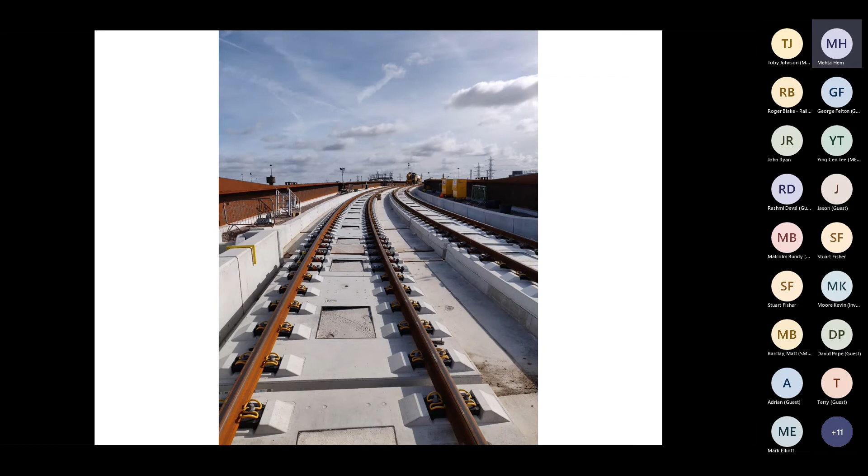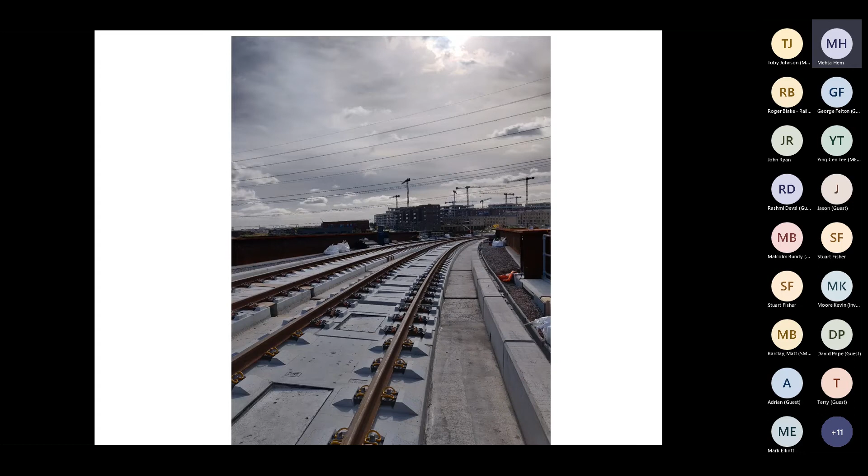And just winding up, this is what it looks like - this is what it looked like on Sunday, actually. This is running down towards Barking Riverside. This is going up over the existing railway lands, the Tilbury lines and High Speed 1. Running down towards the school. Looking back - the pictures don't do it justice. Some of the gradients we've got, and the way the rail actually rolls its way around the curves and transitions, is actually quite mind-blowing. And that's the switch and crossing work going in at the moment.

Just some thanks there to the guys in my team that have been part of this, but particularly from outside of the network, people like Guy Bates from the Strategic Freight Network, Brian Whitney at Milton Keynes, the CEM at the joint venture as well, and the guys who actually undertook a lot of the design, like Paul Malford and Nick Arms. My thanks to them.